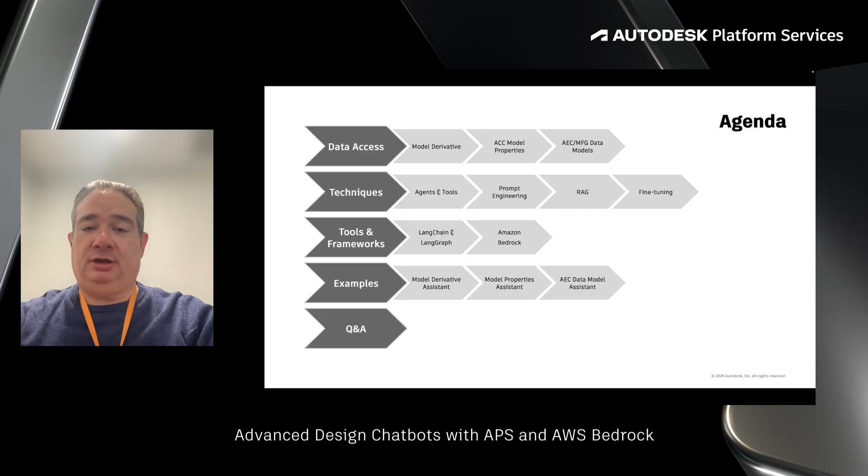With that, we're going to spend time talking about various categories today. First, we want to talk about the different ways we access data within Autodesk Platform Services. Second, we're going to talk about a bunch of techniques used in generative AI to help you get back the answers that you want. Third, we're going to talk about tools and frameworks, and spend a lot of time demoing Amazon Bedrock integrated into the APS viewer. Our examples will be on model derivative service, model properties, and also the AEC data model, which uses GraphQL. And we'll save time at the end for questions and answers.

As with all Autodesk presentations, there's always a disclaimer. I'm sure by now most of you have read this about 20 times, but just in case you're curious, basically Autodesk is telling you not to buy anything, but I'm hoping by the time we finish this that you've put your credit card into the console and started to buy Amazon Bedrock.

And one last disclaimer. To be honest with you, by the time we finish this presentation, whatever you learned in it, as fast as generative AI is moving, is going to be out of date. So please keep that in mind.

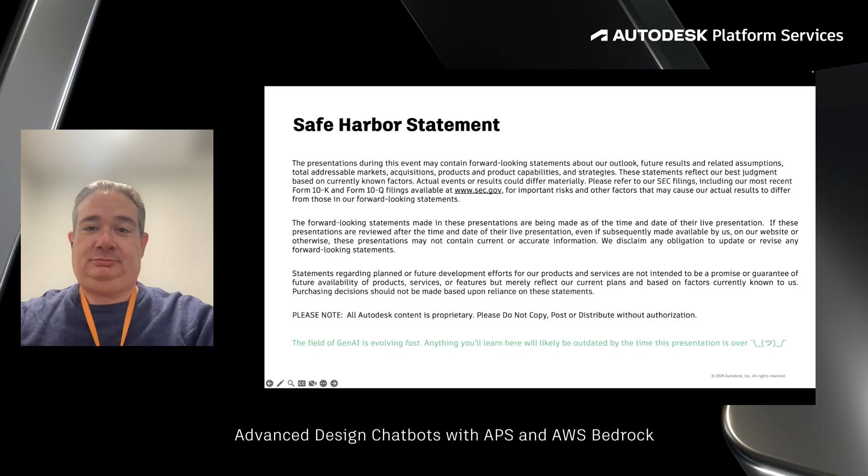Thank you, Greg. All right, so let's start by looking at the different ways that Autodesk Platform Services provide that let you access your design data that you could potentially use in your custom large language model setups.

Our platform provides several APIs meant to give you access to metadata in your designs hosted in different Autodesk products. Model derivative API is a good example. This is a very basic service responsible for extracting information out of your design files. This is something we actually based our first talk on, but there are more options.

There's also the model properties API, which is available for models hosted in Autodesk Construction Cloud. And then, as Greg already mentioned, we also provide AEC and manufacturing data model APIs. This is a GraphQL API that you can also use to extract all sorts of information out of your design data. These are the three services we will be focused on in this talk.

There are other options. You could potentially also use data exchange or design automation API, for example, to extract information out of Revit designs using your custom Revit plugin. And even after loading designs into the client-side JavaScript component that is our viewer, you could use viewer SDKs to extract information out of your designs, but these are considered out of scope for our talk today.

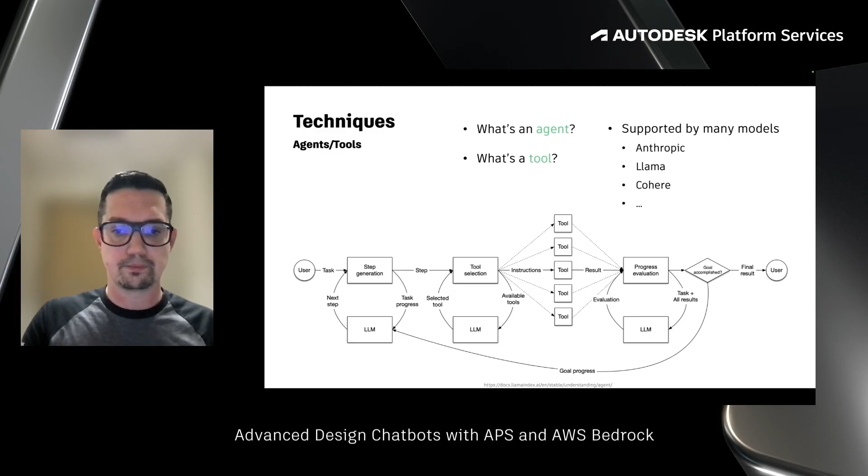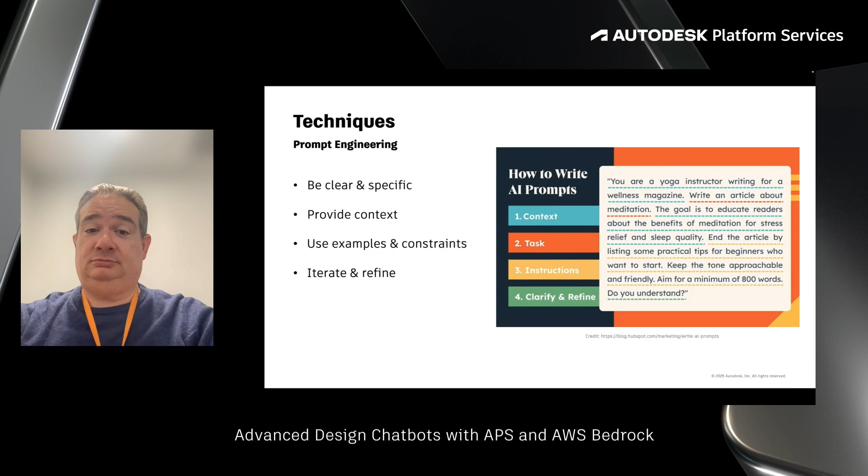The other technique is RAG, which stands for retrieval augmented generation. The idea is you put a bunch of data into a knowledge base in chunks, typically stored in a vector store so it's searchable, think OpenSearch, and you embed the data. RAG implements a k-nearest neighbor search to pull relevant chunks of information back to help answer the question.

When dealing with large language models such as Anthropic, Cohere, or Meta, instead of trying to retrain it, or what some people call fine tuning, you may want to use RAG to help get answers back specifically. So in the case of the time off knowledge base, you could take that information, put it in RAG, chunk it out, and store your policies as vectors, allowing the system to use that to get the correct answer.

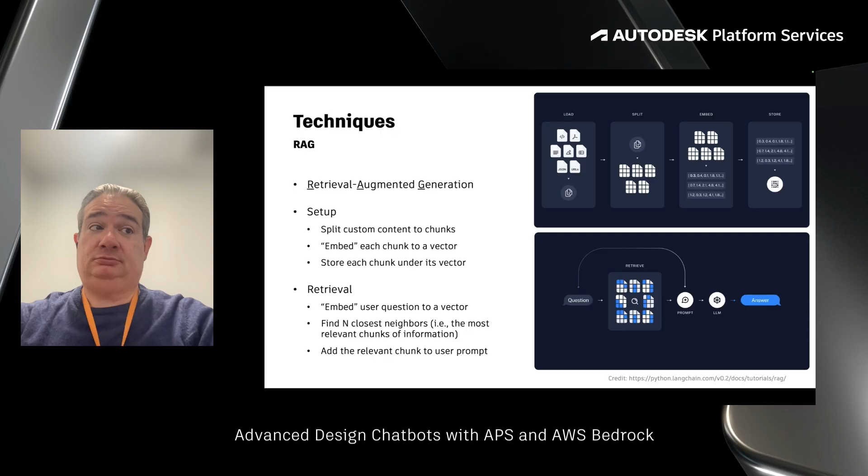If you think about this, you're going to have a data ingestion workflow, because you need to get your data into a vector store. You'll have embeddings models, which are themselves large language models, and then you'll have your data source, which feeds into your vector store.

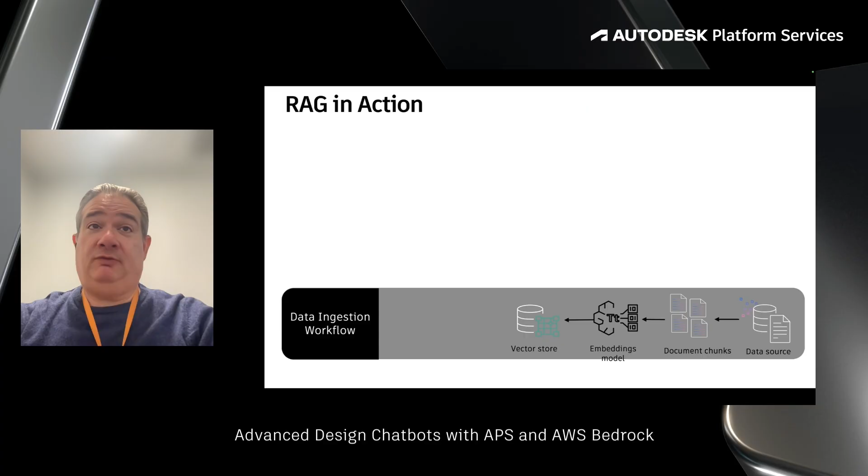You'll use an embedding model, which is itself a large language model, allowing the user to put in a prompt. It uses the context in the vector store to augment the prompt and go to the large language model, so we get a more specific response to our specific question, potentially about our specific data or use case.

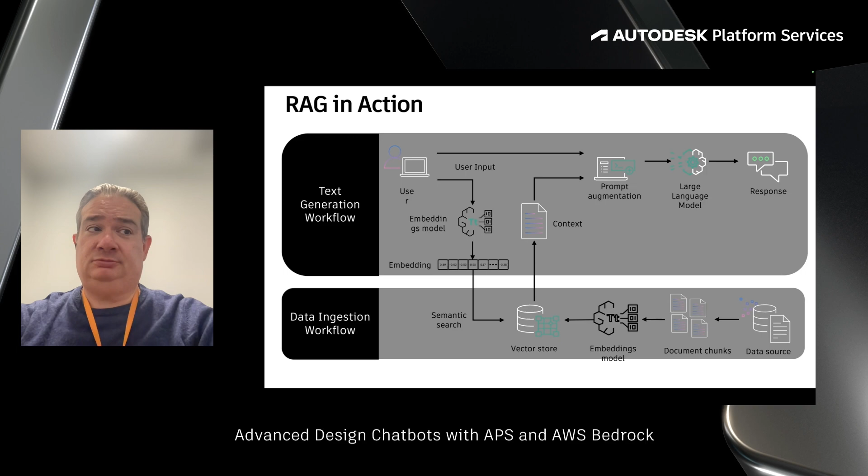I did mention fine-tuning a little bit earlier, and I think fine-tuning is very complicated, and it's not for everyone, because you're going to basically start with one of these existing large language models, or maybe multimodal models if you're dealing with geometry data, and you're going to retrain it on your own data. It's highly expensive, because it requires you to have GPUs, and depending on how much data and how much retraining you're going to do, it could require a lot of time.

However, if you want your model to be specific, you might use the HR example, maybe you only want a model that understands all of HR properties and only has HR properties in it. So the question becomes, do you fine tune something like Llama or Claude from Anthropic, or do you build your own model? Sometimes, in some cases, it's actually better to fine tune when you have specific use cases, giving it additional data sets to move it forward.

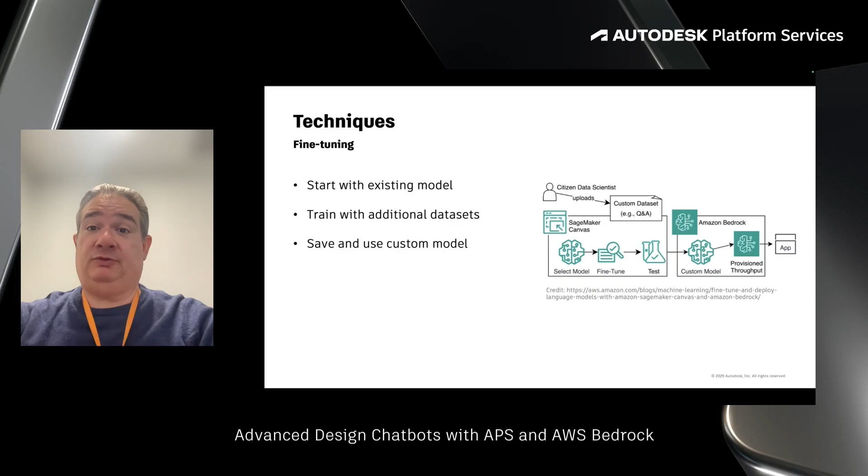Thank you, Greg. All right, so in this next section, let's take a look at some of the tools or frameworks you have available when you're ready to start building your own design chatbot, because you don't need to start from scratch and reinvent the wheel.

A very popular framework in this space is called LangChain, or its peer project, LangGraph. LangChain is a framework for building LLM-powered applications. It can connect to Anthropic, Llama, Mistral, Bedrock, as you will see later, and many others. It's a collection of components that you can combine in your flows. These components include chat models, embedding models, document loaders, parsers or chunkers, vector stores, retrievers, or, as we mentioned earlier, this concept from agentic flows. It lets you define tools as well.

There are built-in components as well as third party, and the ecosystem is really large. The framework itself, LangChain, is available for Python and JavaScript. This is what we used as part of our first talk. This is the framework you would probably use for this question, answer, endless loop.

LangGraph, on the other hand, is more of an orchestration framework for agents. This is where you can actually build more complex graphs, where you can connect agents to tools, and you can give them intermediate steps to plan their sequence of actions, or actually for them to be able to review the results that they've arrived to and see if maybe they want to go back and change their plan a little bit.

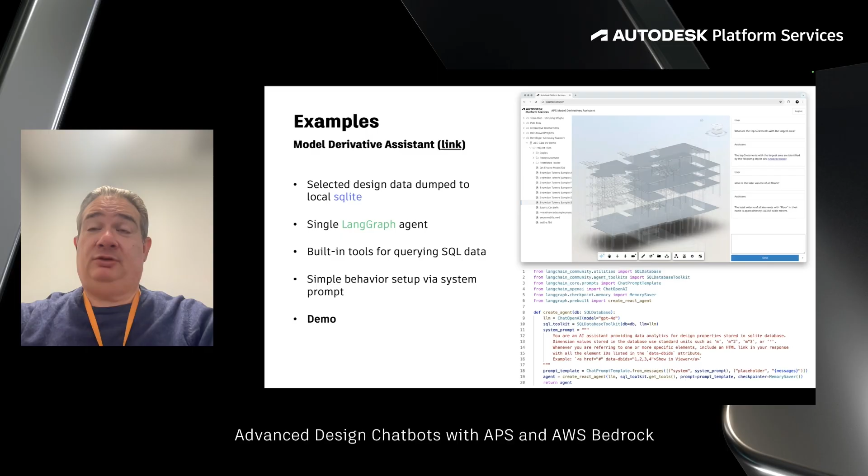Now we're going to get into the examples. We'll start out with a very basic one around the model derivative service, and step our way up to GraphQL. Similar to the demo from our previous AI talk, we're going to use selected design data, put it in a SQLite database, and build a LangGraph agent to query the SQL data, all via natural language prompts. The code on this is very small. With that, we'd like to show you the demo.

As you can see, we're running a local Python server. We're going to go to the web browser to do the handshake authentication for that web server. And now we're opening up our files — I think we pretty much open up the common Snowdon Towers one. Most people who have seen any presentation on Autodesk have seen this example, this multi-use facility.

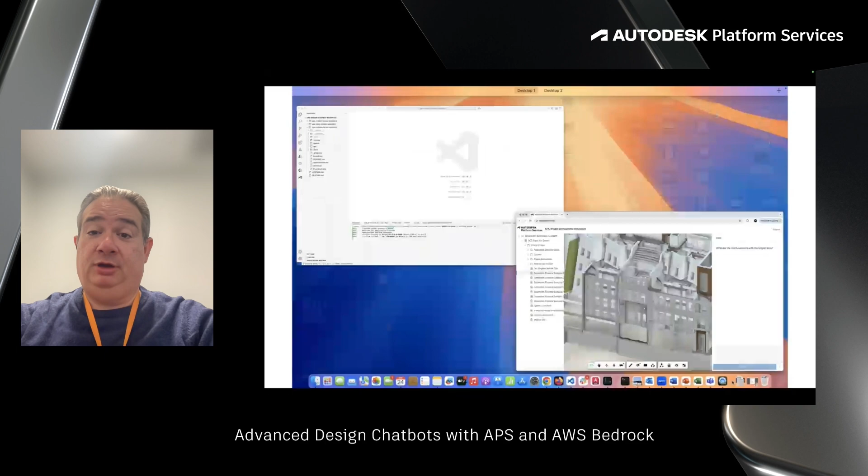We're going to ask it a basic question. You'll see it processing the basic question over in the chat window, and it gives the answer. It shows you how it chains the information together to get the answer, and the answer comes back very quickly.

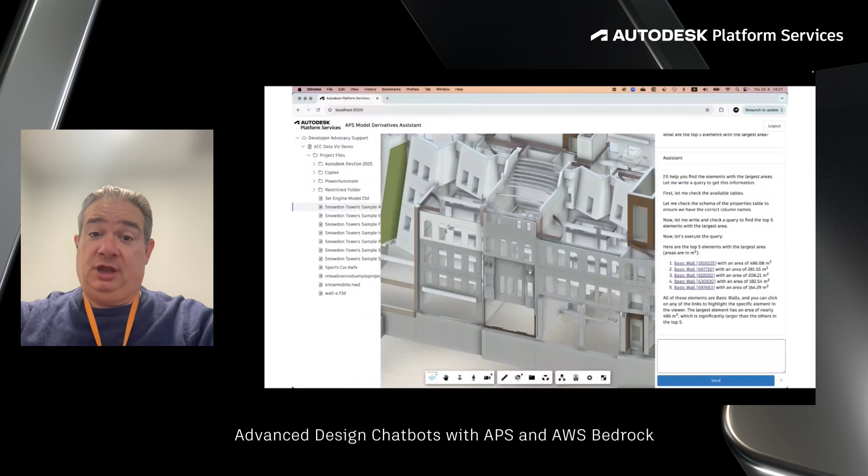Now, if we go back to the console, there's the answer that we just had. Obviously, we're taking advantage of APS capabilities by simply clicking on the JSON property IDs to bring up the item. We're going through, and now we're going to show you the model properties of that object.

We're back to the full building, and we're going to ask it about the volume, I believe. Again, you can see that it's running, and we're outputting what's happening behind the scenes. You can see that it's generating SQL queries to go get this data from the SQLite database. So it answered the question.

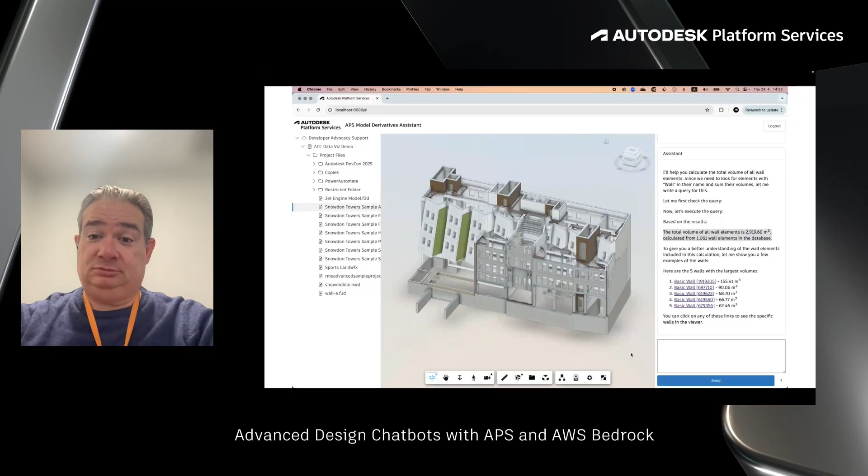Yes, that is the end of the demo. First demo. Thank you. Thank you, Greg.

The next example is one based on the ACC model properties. In this case, we are advancing the complexity of the solution. We're introducing multiple custom tools. While in the previous example we used just a built-in tool available in LangGraph to generate SQL queries from text prompts, in this case we will provide a couple of custom tools to our agent. One, we will include a tool for building the index of all properties for a specific design, so that the large language model actually knows what kinds of properties are available in that design when it wants to query it.

We provide a tool for retrieving these properties and a tool for actually executing a custom query over that data. We also include a small tool for processing, because the data the agent receives back from our APIs will be all JSON. We include a tool that can process the JSON data using the third-party utility called JQ, which can extract and process JSON data in different ways.

Also, since I mentioned earlier that the ACC Model Properties API uses a custom syntax for querying and building queries over the data, we need to teach the large language model what this syntax looks like so the agent can generate these queries properly. We do that using what's called a system prompt, where we provide a static description.

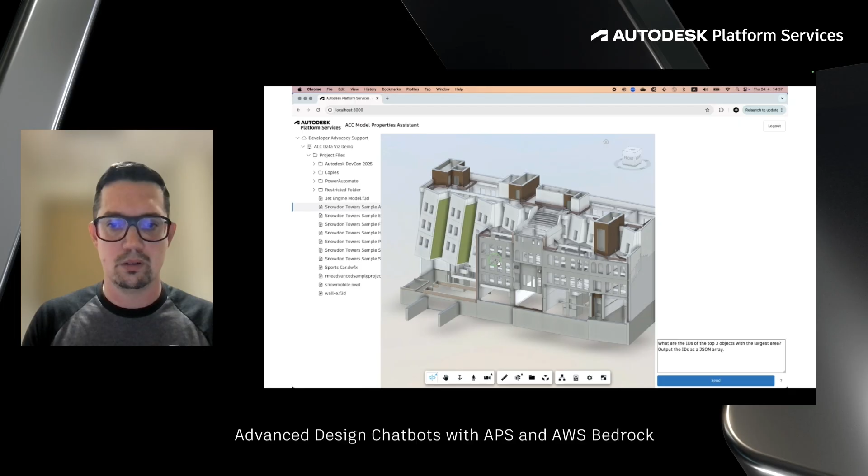For example, what are the walls with the largest area?

And again, we can look at the log file to follow the thought process of our design chatbot. First, you'll see it try to start building the index of properties. It actually laid out this three-step plan for itself: it will try to build the index of properties and then retrieve these properties. That's where we're at right now.

So now the agent knows what kind of properties are available, and now it will try to start collecting the areas of the individual elements so it can find the five largest ones. Here, what we do is intentionally throw an exception from our tool when there are too many results, because we don't want to exceed the size of the context window. So we're basically being mean to our agent, forcing it to reconsider the queries it's generating so that it gets fewer results.

Here now it's been able to first try to get the largest available area, and then based on that, it can adjust the generated query to get the information it needs.

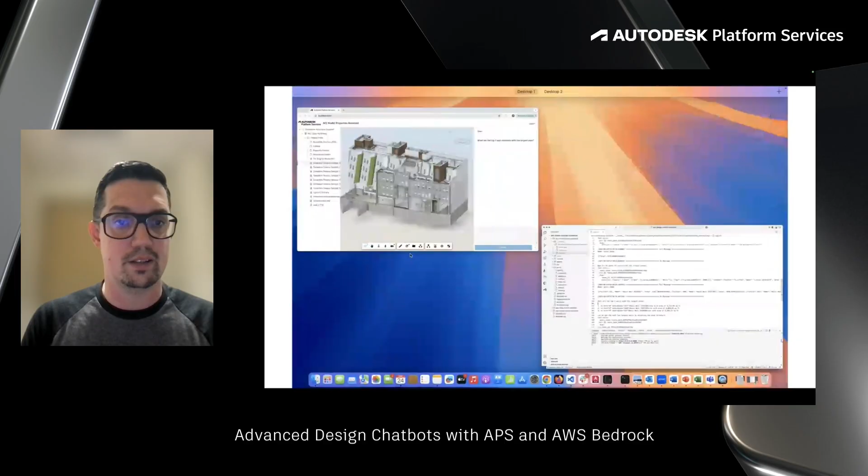All right, so here it found three elements with the largest area, but of course we asked for five. So now it's actually trying to execute additional queries into the Model Properties API. And now it identified several objects with an area of, let's say, 5,000 square feet or 3,000 square feet.

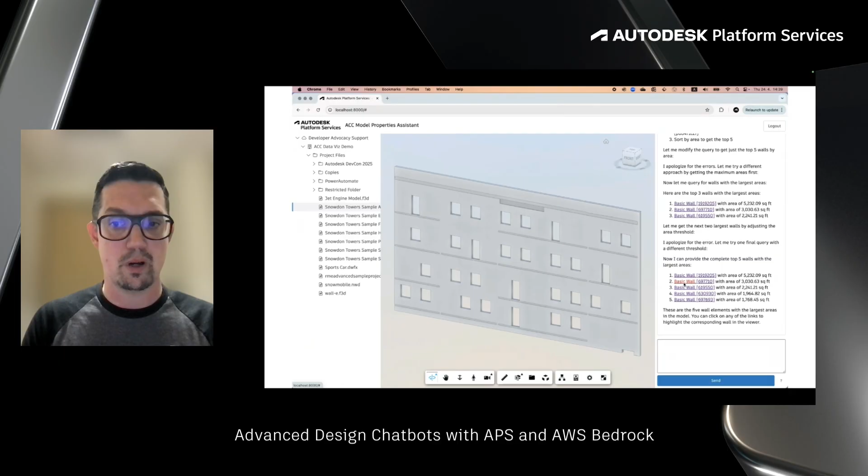And again, we can double check that it's not hallucinating any information, that the area is, in fact, in this case, 1,768 square feet.

And just like before, we can try and test an aggregation query. So we're asking for the total volume of all elements. And here, since, as we mentioned earlier, model properties have the benefit of providing aggregation functions, you can ask for a sum of volumes or areas and issue this query into our servers, into Autodesk Construction Cloud, and the sum will be calculated on the server side. That makes it very easy for the model to actually get that total volume.

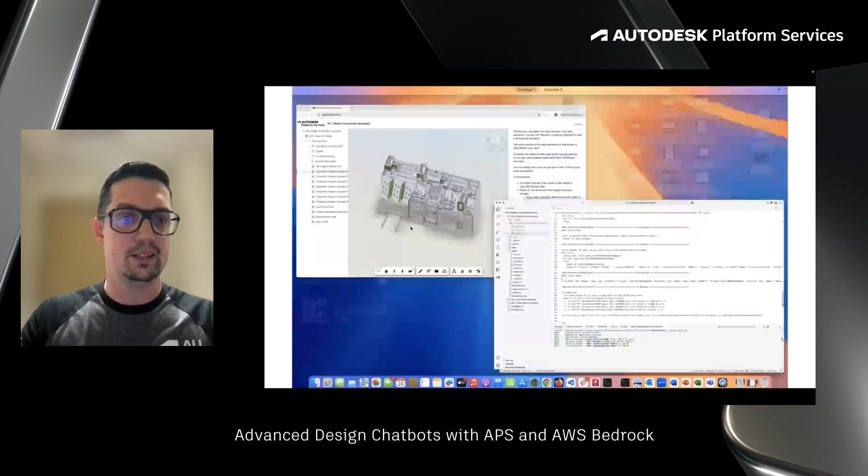So as you can see here, we already have the total volume, but the agent is actually trying to find some of the largest elements to not only give you the answer of the total volume, but also the elements that are contributing to the total the most. So here you can see it's 103,000 cubic feet, and these are some of the elements that are really contributing to the total.

All right, that was our second example.

And the final one is the assistant based on our AEC data model. We're stepping up a little bit in terms of complexity, introducing a couple of custom tools. We provide the agent with a tool that can execute a GraphQL query against our data model API.

We once again provide the agent with a tool for processing JSON data using JQ. In this case, we're introducing RAG, retrieval-augmented generation, where instead of putting the complete list of properties into the context window, which could be really large, we build a vector database of all the different properties available in our design, and use retrieval-augmented generation to cherry pick property definitions most relevant to the user's question.

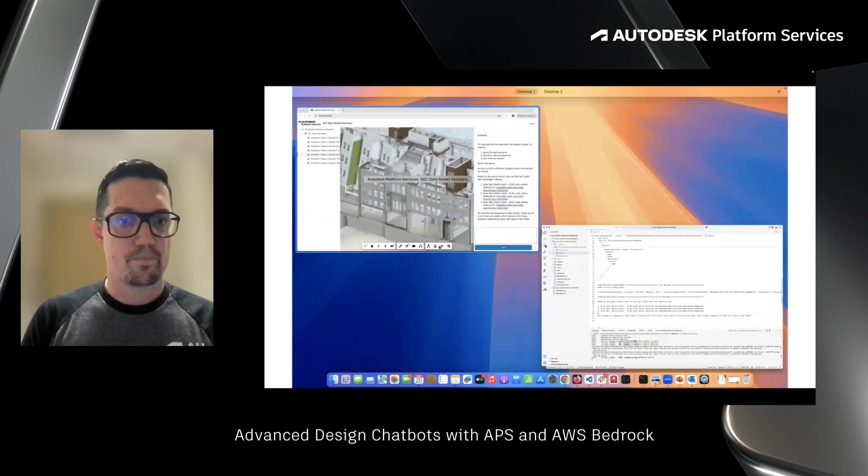However, I'm not entirely sure this is the right thing. I'm asking, hey, I don't think you've gone through all the walls because there's this concept of pagination, and I haven't seen the model actually go through additional pages. Now it's being very apologetic and trying to fix its mistake, following the pagination capability of our API, calling additional queries with cursors. In our GraphQL API, a query can return results with a cursor pointing to another page, so the model keeps calling until it gets through all the pages.

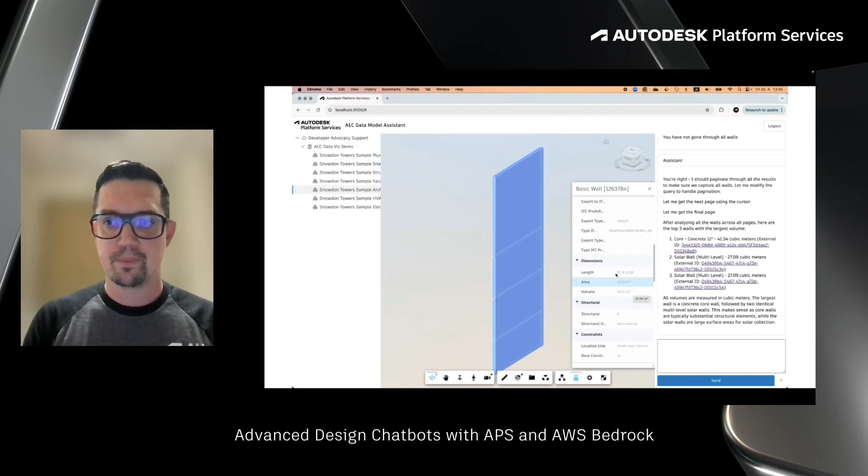With this, the model should have enough information to answer our question. As you can see, I'm not entirely sure, so we received, okay, this actually might be right. We check the properties of this basic wall and see the volume is 41 cubic meters, which corresponds to the data the assistant provided, so it's not hallucinating. Although we want to be really sure the agent actually goes through all the pages, otherwise the results it provides will not be correct.

All right, and Greg, back to you.

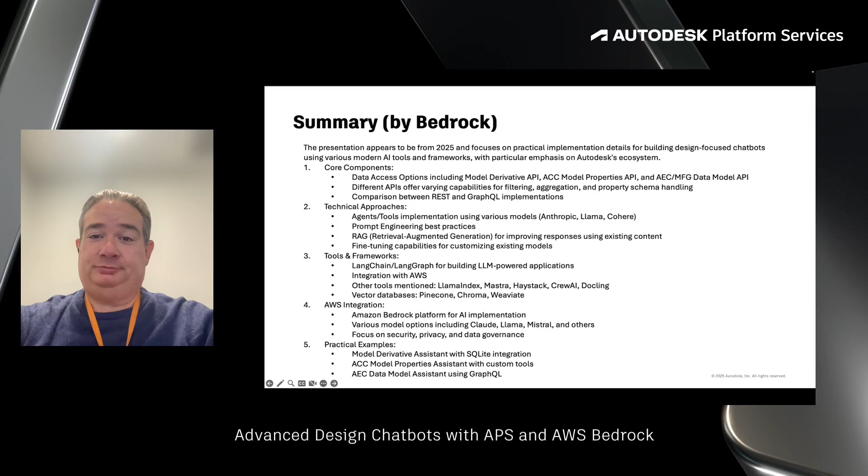Awesome, thank you so much, Peter. Thank you, Peter, it was a pleasure working with you on this. Pleasure as always.